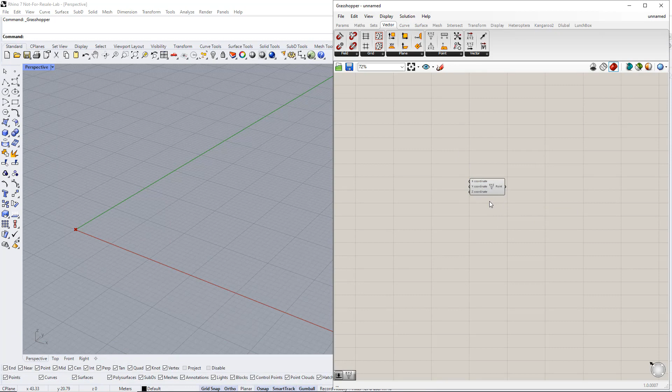First, we create a point using the construct point component from the Vector tab. Afterwards, we copy this point twice by holding down the Alt key and dragging the components.

For the second, we set up a range to the x-coordinate, for example, from 1 to 50. We then enter width for this slider name.

We would like to set the third point in the middle of these 2 points, but with variable height. The x value has to be the x value of the second point divided by 2. To do that, we insert the division component from the Maths tab.

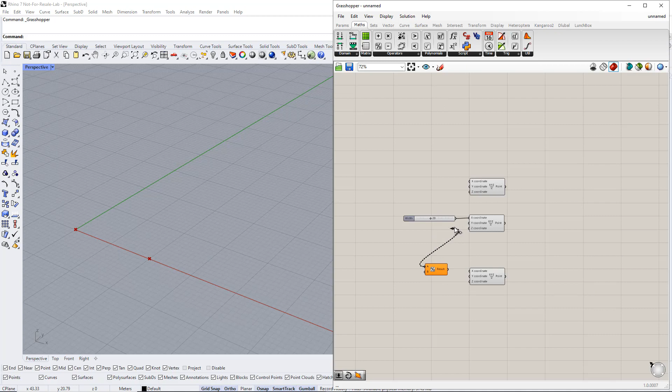Now, we connect a to the number slider. For b, we enter 2, using the panel command. Afterwards, we set up a new range for the z-coordinate, for example, from 0 to 10. After that, we enter height for this slider name.

In the next step, we create a curve from these points using the interpolate component. You can find it in the Curve tab. Afterwards, we plug the 3 points into this command. Make sure you use the right order, as shown here.

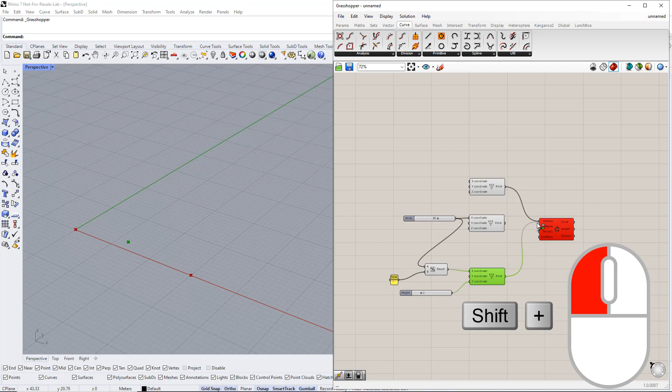We can also define the curve degree using the number slider command. We set up a new range between 1 and 5.

Next, we copy this curve in the y direction using the move component. We also insert the unit vector parallel to the y-axis component. Now we set up a new range, for example, from 1 to 100. Then we enter length for this slider name.

After that, we create a surface through these 2 curves using the loft component. You can find it in the Surface tab. Then we connect these curves to the curves in the loft component.

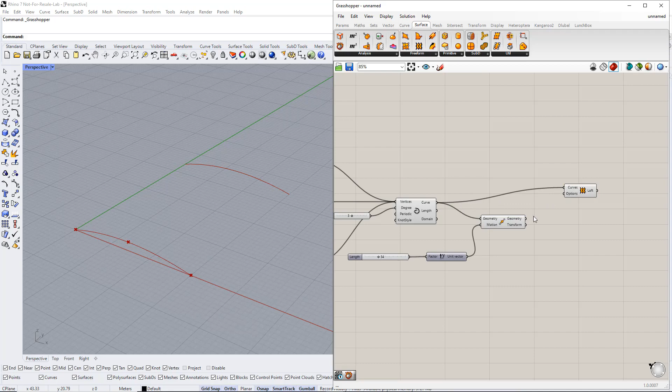In the next step, we create a space truss structure on a surface using the Space Truss Structure 1 component. You can find it in the Lunchbox tab. Then we plug the loft component into the surface in this component.

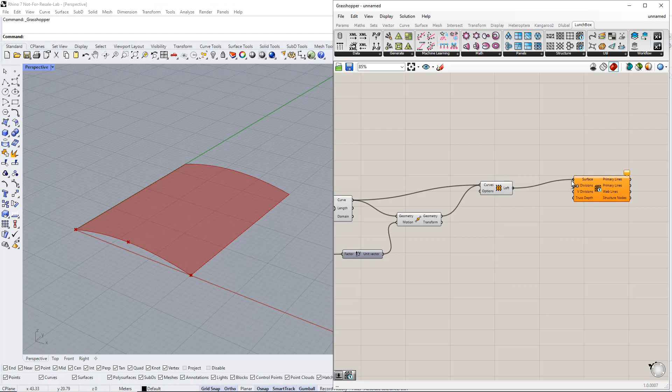We also need to set the divisions in this surface in the u and v directions. For this, we set up new ranges, for example, from 1 to 20 for both directions. After that, we set up a new range for the truss depth, for example, from 0 to 5.

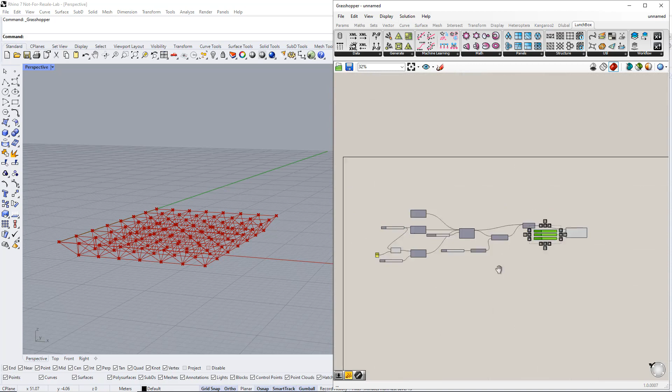Next, we put all the number slider commands together in a group to control all the parameters easily. Then we enter parameters for this group name.

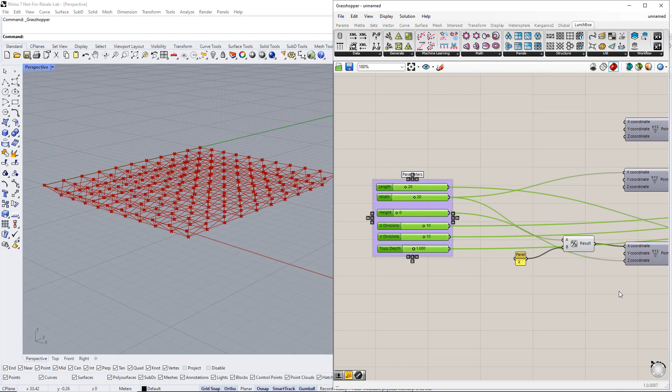We can see which lines exist in these options using the line command.

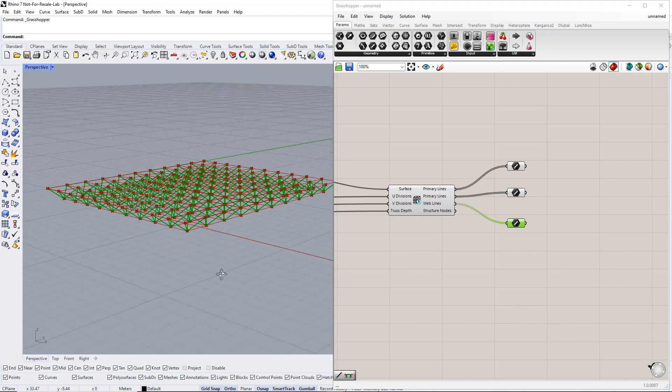Now we assign members to these lines using the member component in the Dlubal tab. Then we connect the lines for the upper and lower chords to the Grasshopper line in the member component.

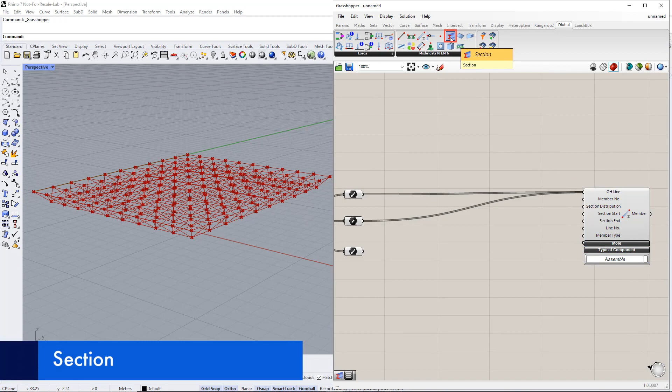In the next step, we define the cross-section using the section component in the Dlubal tab. Then we enter number 1 for the cross-section number, and CHS 82.5x5 for the section name.

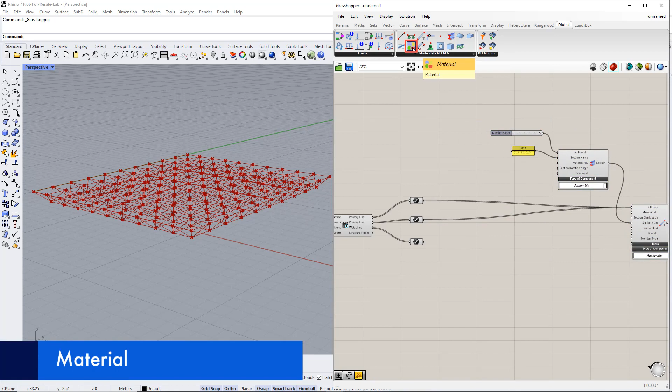Afterwards, we define the material using the material component in the Dlubal tab. Then we enter number 1 for the material number, and S355 for the material name.

For the remaining members, we assign another cross-section. Therefore, we copy both the member and the section components. We have to change the section number to 2, and the section name to 76.1x5.

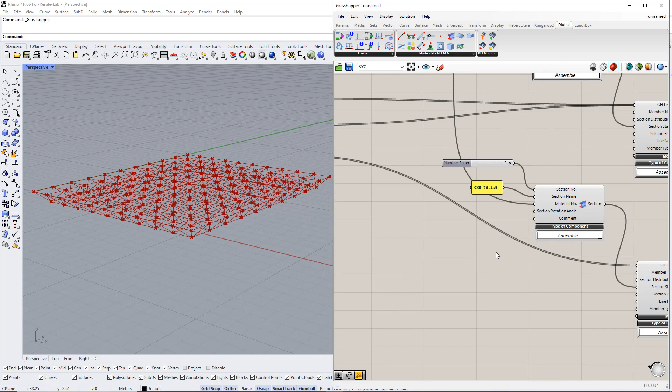Next, we transfer these model data to RFEM 6. We have to insert the RFEM 6 export component from the Dlubal tab. To start the export, we use the Boolean toggle command.

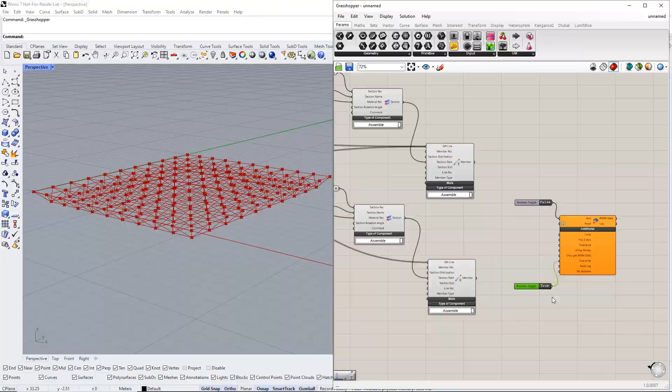We will also overwrite the previous data in RFEM by using the Boolean toggle command and switching it to true. After connecting all the components to the RFEM 6 component, we double-click the Boolean toggle command to perform the export.